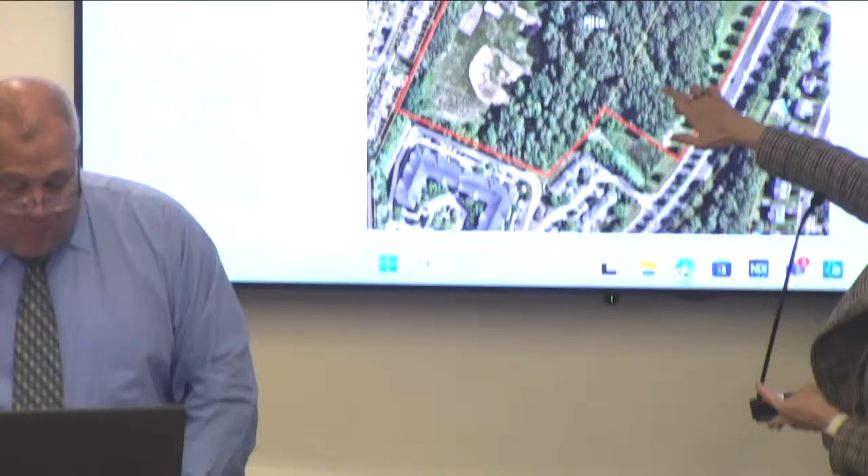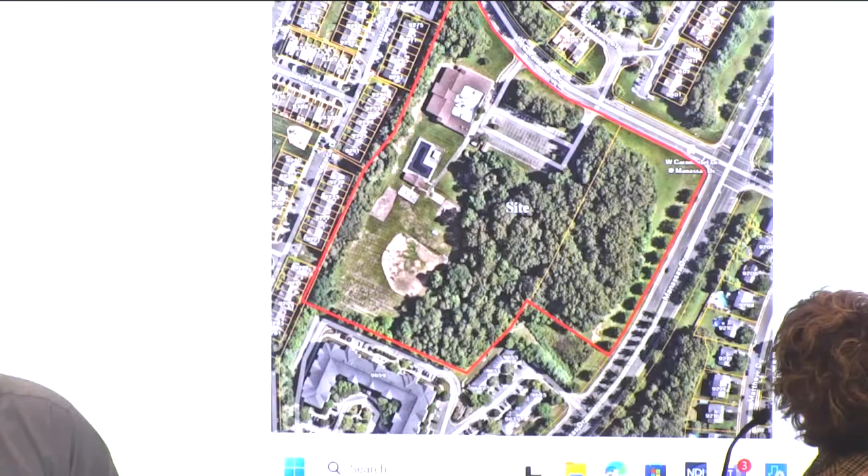So we talked about the number of units. There are 2 types of townhomes: some will be front-loaded, meaning the driveways are in the front, the remaining will be rear-loaded, meaning the driveways are in the back. The rear-loaded ones will front on West Carondelet Drive, so when you drive along West Carondelet, you'll see the fronts of the townhomes facing the sidewalk. There are also a few remaining townhomes that front on the community green, which is a 30,000 square foot amenity area for the proposal and development. We do have this one photo up here, so I would like to use it, but most of that area, excuse me, Carl, will remain as open space. It's identified as a conservation easement on the plan, measured about 150 feet from Manassas Drive, but this whole area will remain essentially as is, which is one of the benefits of the community in terms of preserving open space. So then you have a more concentrated number of units in the remaining portion of the site.

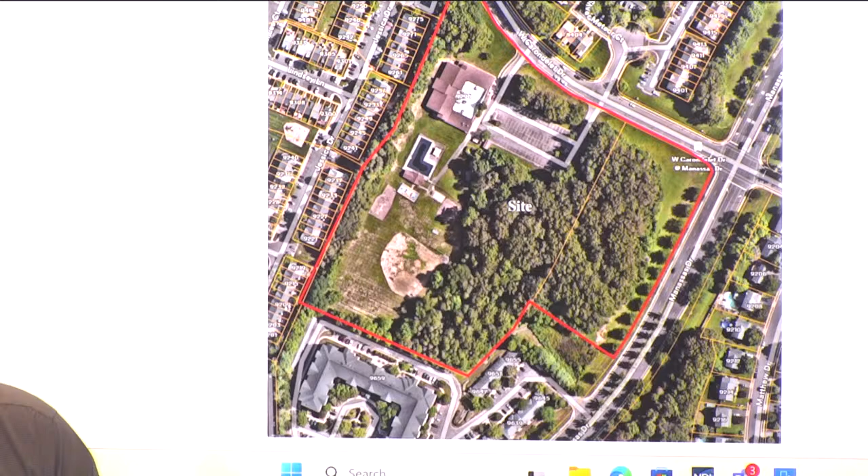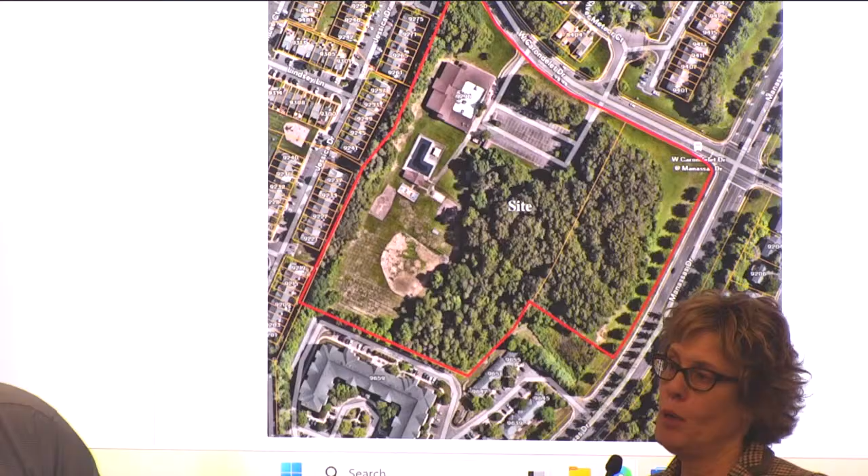There will also be 11 ADUs for the property. 6 will be workforce housing, which is essentially for city employees on a first-come basis. And then there are ADUs for city residents at up to 70% of the area median income. These are for sale, so the prospective purchasers of the affordable dwelling units who meet those income requirements will be purchasing the property through a qualified lender. So this is a home ownership program.

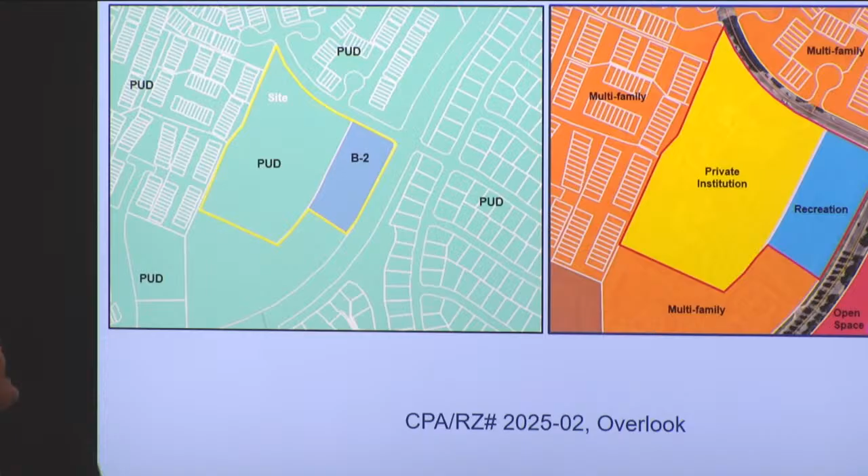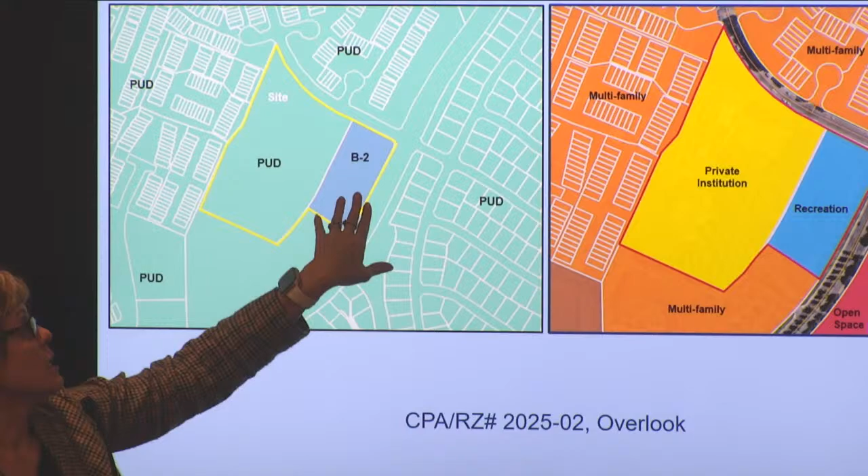Okay, so let's get back to basics: the comprehensive plan and the existing zoning. So these are the two parcels that we talked about. Here's West Carondelet. The former Christian school is zoned PUD, which is Planned Unit Development, and the open space area is zoned B2, which is commercial business.

For our land use map, what we would like the city to look like in the future—this has been identified as private institution because of the school, and this is a recreation area. It is in the Parks and Rec chapter of the comprehensive plan and deemed open space.

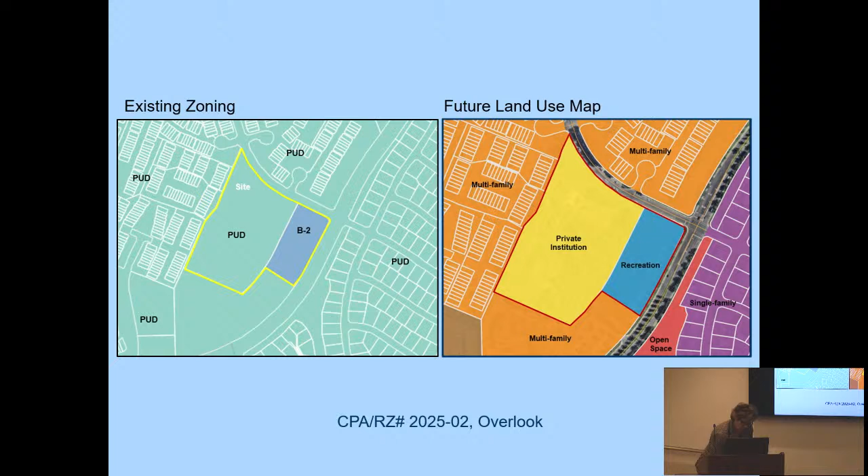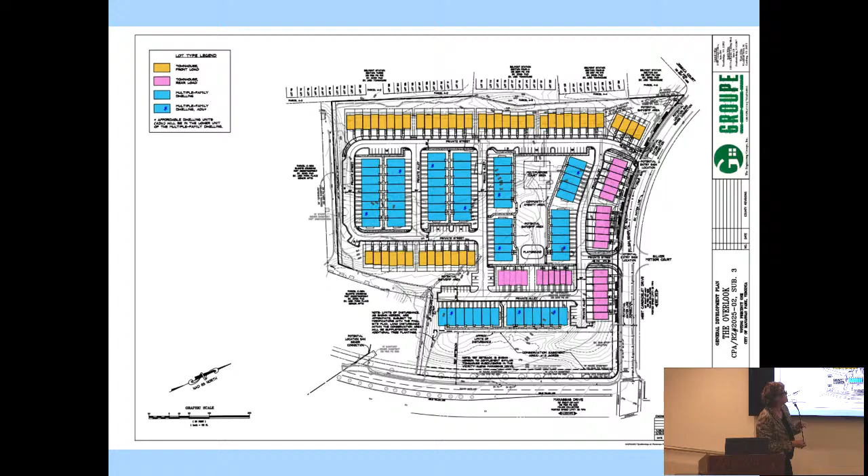Next slide, please. So the planned unit development—I just wanted to go over the zoning requirements. There are no minimum lot sizes or maximum density. This flexibility is offered for a variety of things: innovative site design, variety in housing choices, higher level of amenities, and preservation of open space and natural features.

And this application actually hits all those marks. It is a bit tighter because they are taking some of the land and dedicating it to either open space or this community amenity area, which a lot of the developments in Manassas Park do not have. So it would be a nice amenity, newly designed, for a community in Manassas Park.

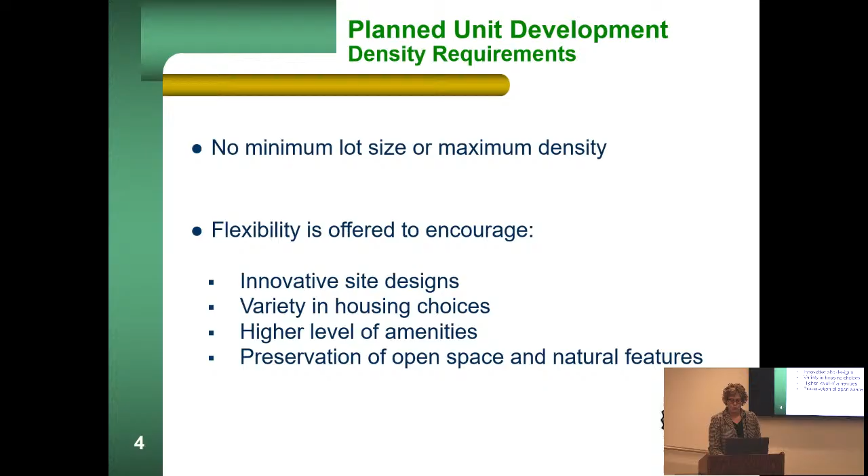Next slide, please. I did just want to take a look at the density, meaning the dwelling units per acre, of the surrounding developments. So if you're not familiar with all the names—Belmont Reserve, Belmont Station, Bloom's Crossing Townhomes, Dominion Crossing—those are all townhouse communities, and you can see that they range from 6 dwelling units per acre, 6.8, to around 10, 11, or 12 if you round up at Belmont Station.

The two apartments, Palisades and Park Place Senior Apartments—it's 18 units per acre for the senior apartments and 28.6 units per acre for Palisades. The Overlook is in between. It does have a mix of 2/2 condos, which we consider under the zoning ordinance as multifamily, similar to apartments, and it comes at 16.2. So it is in the middle of the townhome density range and the apartments.

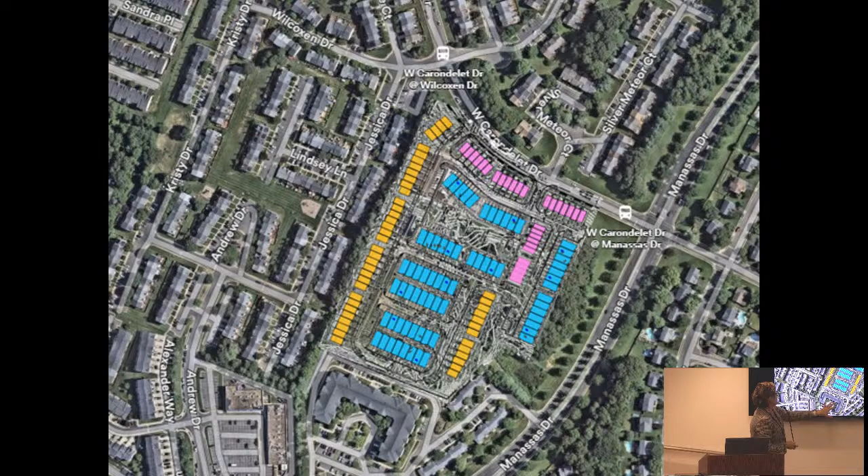Next slide, please. So I just wanted to overlay this plan on what it's going to look like in the surrounding community. I think the applicant did give some thought as to how the layout and the site could be best developed and pleasing to the residents who are going to be living there. As you can see, you have this big apartment building for the senior center, which is quite large, and what they've tried to do is concentrate that bulk of the area and intensity closer to an existing apartment building.

The ones in the middle, up towards West Carondelet—you can't see it here, but this is that 30,000 square foot amenity area that all these units will face onto this open green, if you will. And smartly, they did put the townhomes next to the existing townhome communities, fronting so they are equal or equivalent to what's across the road. Oh, next slide, please.

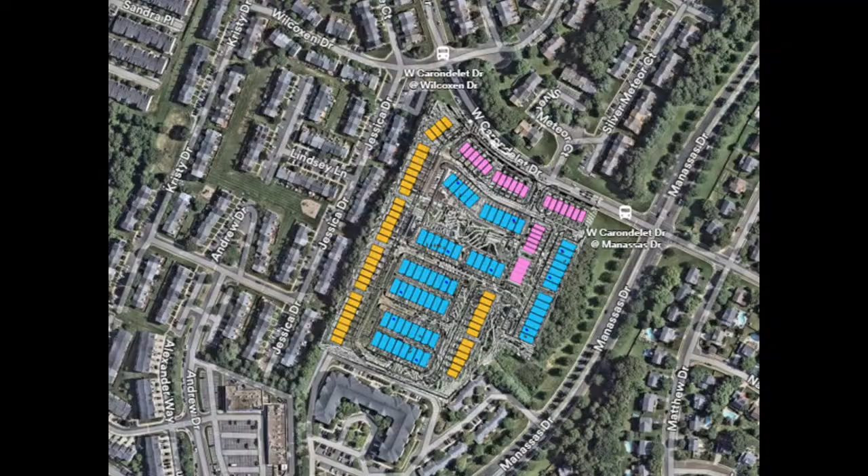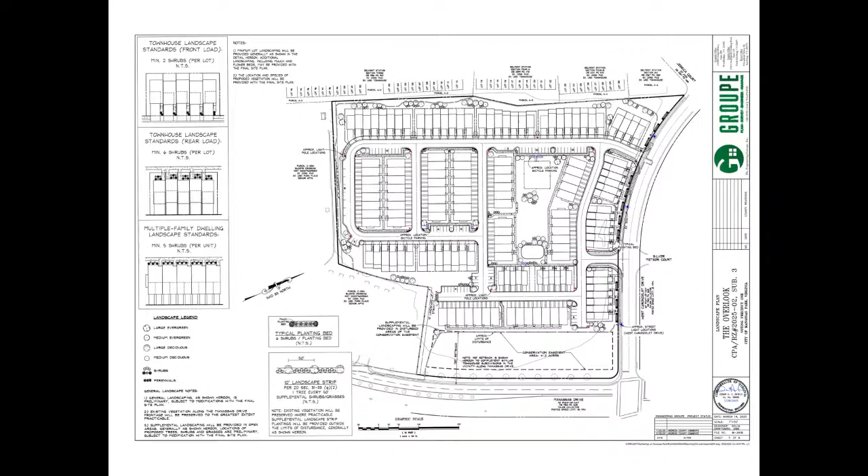I know you can't really see this, but I wanted to emphasize this is the landscape plan. You can see some of the trees and shrubs in the community, but what I really wanted to highlight is they are going to be providing streetlights along West Carondelet, 3 of them, and they will have interior lighting of the parking lots, which some of the newer communities unfortunately do not have. Staff requested that the applicant provide that, so we know there will be safety within the community.

So there are 6 public facility waivers. They all are related to private streets. I'm not going to go through all of them, but basically it's either reduction or removing some of the requirements. Residential frontage on private streets - certainly all the streets inside are private, and they will be maintained by the HOA. They couldn't be developed without frontage on a private street for this development, and many developments done recently don't need sidewalks on both sides of the street. We're doing it as provided on the GDP. There is a nice sidewalk network, especially around the green, and it ties into the sidewalk on West Carondelet Drive.

There's a cul-de-sac requirement for private streets. They're asking for that to be removed - certainly does not make sense with the site layout. And then they are requesting a reduction in the private street width, which is 30 feet in our public facilities manual, down to 26 feet. The 26 feet is the minimum requirement that the fire marshal will agree to and provide under the fire code for emergency access. So staff is supportive of that.

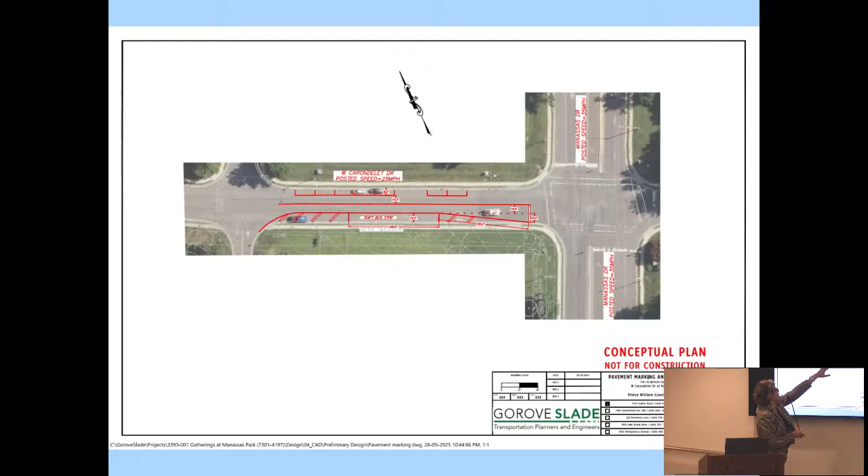So this was their concept plan. It shows that they need 100 feet for the taper. The bus stop standard is 100 feet for the safety of the bus to pick up and drop off, and then they identified this for easy maneuverability for the bus as no parking.

So staff went out to look exactly at what is currently there. This was a measurement of this area of the frontage along West Carondelet. You can see the bus stop, it's already at 50 feet for the bus area. We have confirmed with OmniRide that width or length is acceptable for a bus to safely come in and out. There is approximately 141 feet of on-street parking, and there's no parking measured approximately 20 feet from the curb. There's no signage here, like 61 feet to the first bus stop sign, which has an arrow. This bus stop says no parking, the arrows are pointing inward.

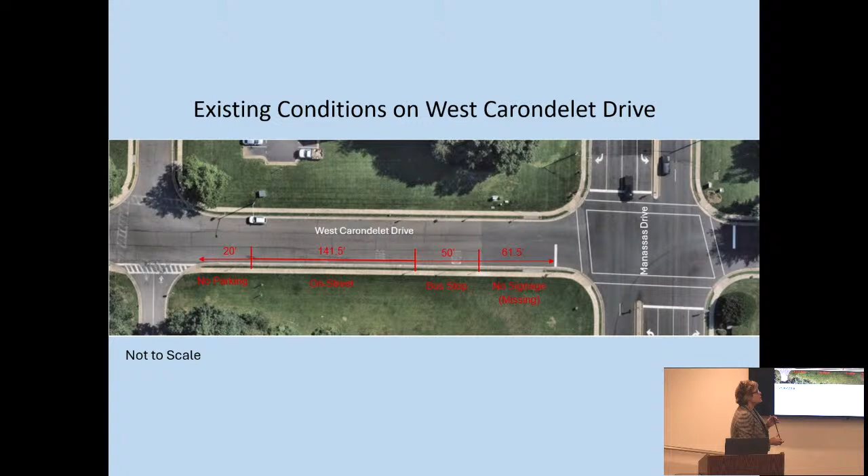So I asked staff, because we have a requirement that you cannot park within 30 feet of a stop sign, and the stop sign's right at the stop bar, so there is no signage here. We believe somehow the signage is missing, but this probably should have been no parking all the way down, so that's 61 feet. In working with OmniRide, staff has come up with an alternative proposal, which does move the bus stop, and OmniRide requested that if it is moved, it become ADA compliant. It does accommodate the taper as recommended in the traffic study. There is a reduction in on-street parking, but only approximately 2 cars, which is 40 feet, and then retaining the no parking 20 feet from the curb.

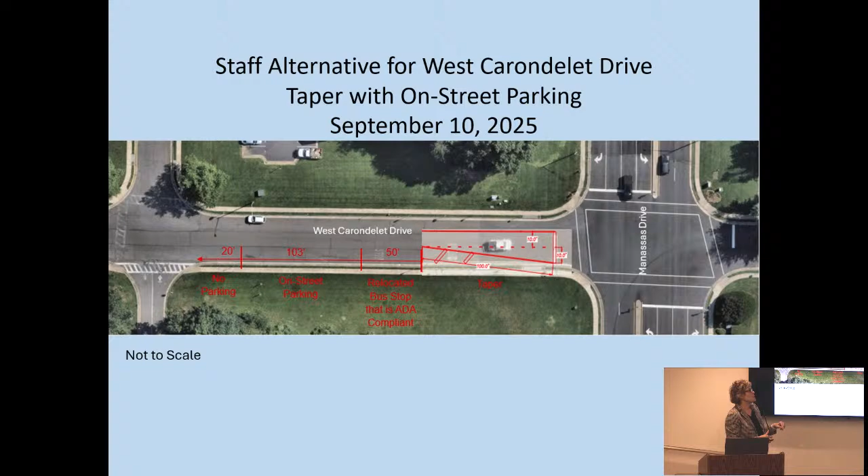So I just wanted to highlight some of the main points of the application. They are providing affordable dwelling units. They have significant parking, and I just wanted to touch on that - you know, parking is a big issue.

Just for some history, we did update the parking regulations in 2016, and while the townhouse units remained the same rate, the multifamily did not - it actually increased. It was 1.5 spaces per unit, it is now 1.75 spaces per unit plus 1 space for every 10 units. So 1.85 actually when you do the math.

And most importantly, the garages are counted as half a space, so all the surrounding developments were parked under the old code. This is one of the developments that will be using the actual regulations in the zoning ordinance for parking without any waivers. So they are providing 279 driveway spaces, counting only 140 garage spaces, and then 80 surface spaces in the development. So when compared to adjacent communities, there is a lot more parking for residents here than in other existing developments. They do have a central community space, a significant green area with a playground, a multi-purpose court, and green space for picnics or relaxing.

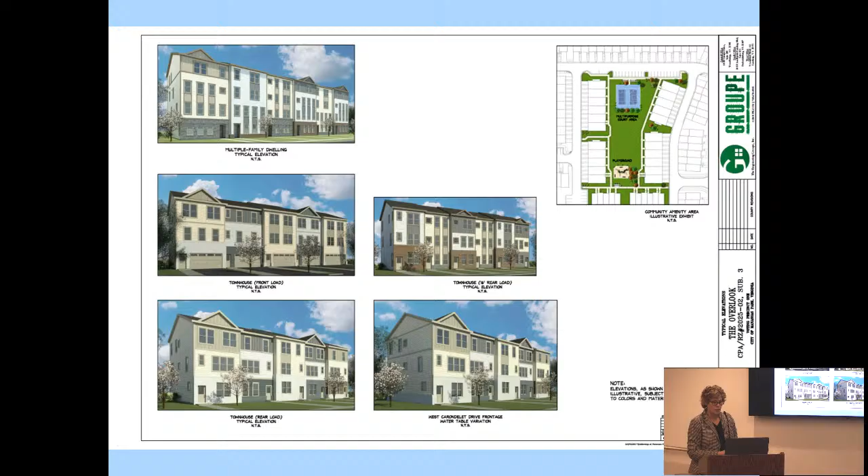Here is a rendering of the development as it would look from the perspective of West Carondelet Drive and Manassas Drive. You can see the street trees here, and there's still a lot of remaining trees. You can see the townhomes along West Carondelet Drive, and a portion of the 2-over-2 condos, though they're enclosed within the community. They are proposing to put some type of masonry water table on the end units, just to give it a little more architectural character as you drive by.

This went to the Planning Commission last week. They made a decision on September 10th; the public hearing was a month before, in August. The Planning Commission recommended to the governing body approval of a comprehensive plan amendment to change those parcels to multifamily residential. They approved the rezoning, subject to the general development plan shown, which is the third submission, and the proffers dated July 28th, 2025. They also wanted to modify the application by constructing the staff-recommended taper with an ADA compliant bus stop and about 100 feet of on-street parking. The Planning Commission recommended approval of all the public facilities waivers except one: they wanted to retain the streets as 30 feet in width. That was their recommendation.

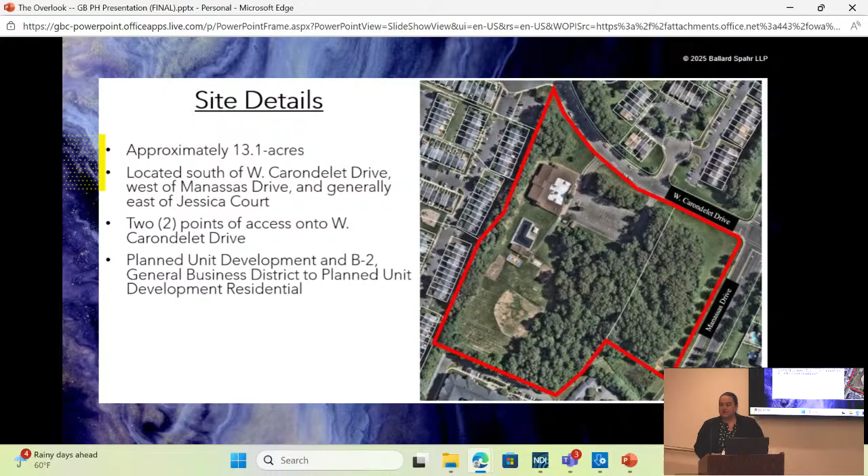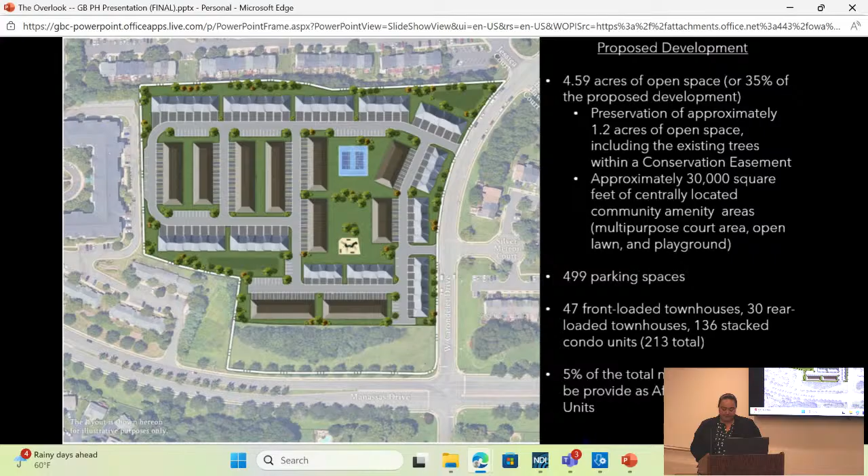The Overlook provides a thoughtfully designed community with 4.5 acres of open space, including a robust 1.2 acre tree preservation area along Manassas Drive and a 30,000 square foot centrally located community amenity area. Something we consistently heard from the community was a desire to see parking provided in excess of the 432 spaces required by the zoning ordinance. We are pleased to provide 499 parking spaces, 67 spaces in excess of the ordinance.

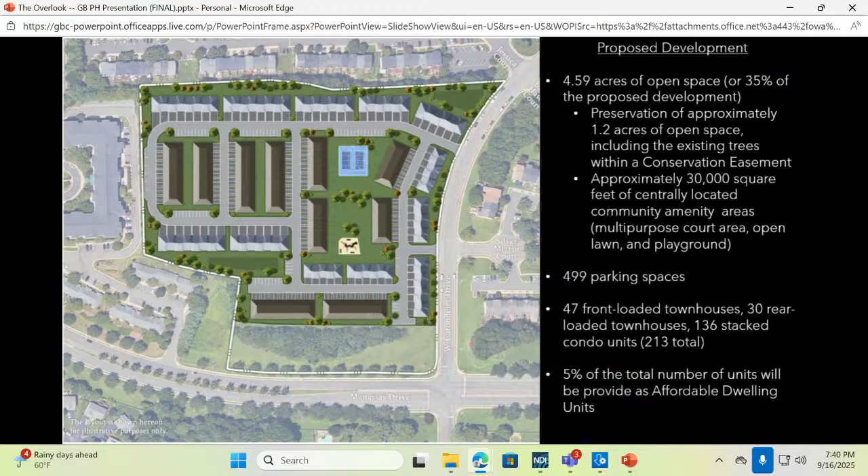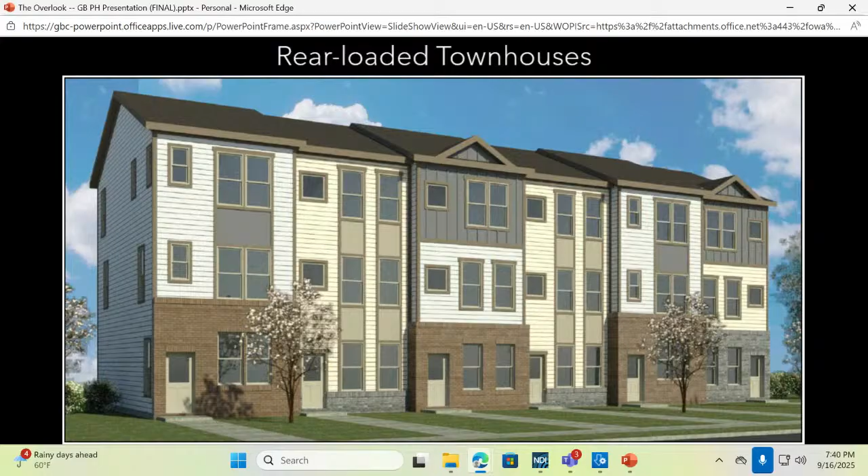The community consists of 47 front-load townhomes, 30 rear-loaded townhomes, and 136 stacked condo units, for a total of 213 units, 11 of which will be affordable dwelling units.

Although staff is supportive of the application, they identified one open question in the staff report. In short, while the traffic analysis concluded that a right turn lane taper along West Carondelet Drive may be warranted, it would require removal of the on-street parking. We've heard from the community that retaining the on-street parking is critical, so in the proposal before you this evening, we have deferred to the community and are not proposing the right turn taper.

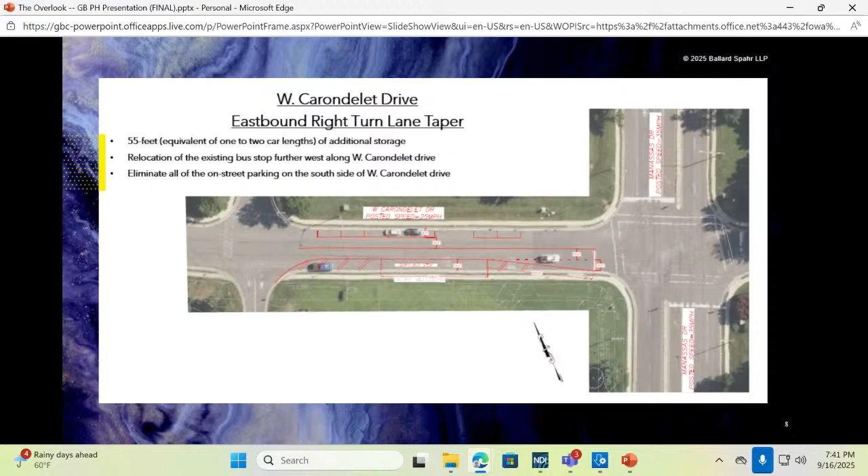However, the Planning Commission, as part of its recommendation of approval, is endorsing the staff alternative depicted here, which Michelle detailed in her presentation. The applicant is amenable to providing this alternative if so desired by the governing body.

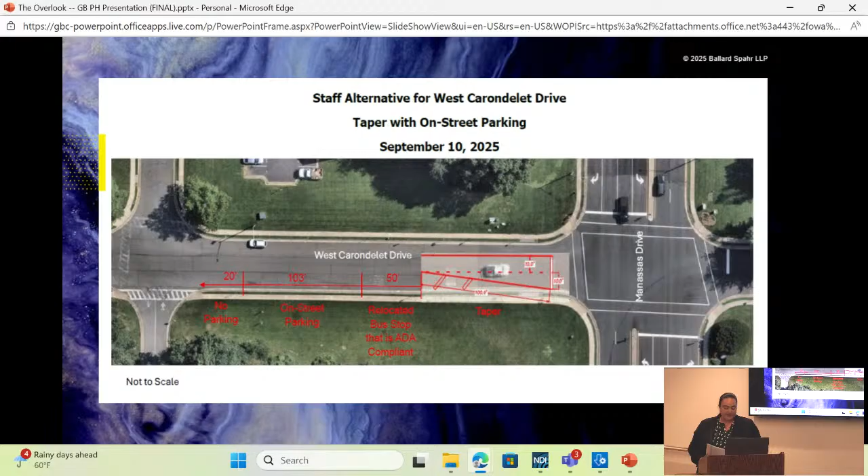While the application has been processing through the city, the applicant engaged with the Belmont Station HOA, Bloom's Crossing HOA, and Park Place on several occasions leading up to this evening's public hearing. Most recently, on July 22nd, the applicant hosted a community meeting advertised on the city's website with residents of Belmont Station and Bloom's Crossing to walk through this application and answer questions. Based on feedback from the community meeting and Planning Commission public hearings, we'll go into more detail on topics such as parking, transportation, schools, affordable housing, and the shared property line with Belmont Station.

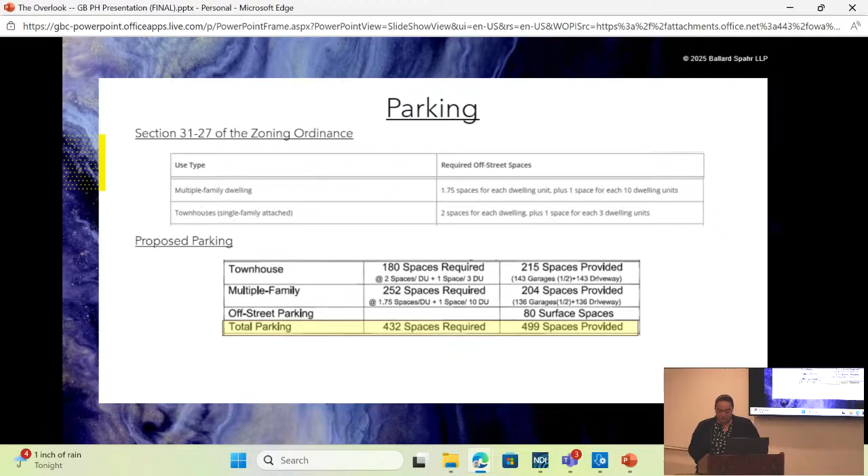First, parking. We are providing 67 spaces in excess of the zoning ordinance, which requires 432 spaces, for a total of 499 spaces, 80 of which are off-street surface spaces. It's important to note that each garage space only counts as half of a space. Kayla Ord with Gorove Slade will dive a little deeper into transportation now.

So as was mentioned, the property was previously occupied by a private school, and before the school closed, we collected traffic counts to establish a baseline trip generation for comparison. In the morning, the school's peak overlaps with the commuter peak hour, and because of this overlap, the proposed residential use will actually result in a reduction in traffic during that morning peak hour.

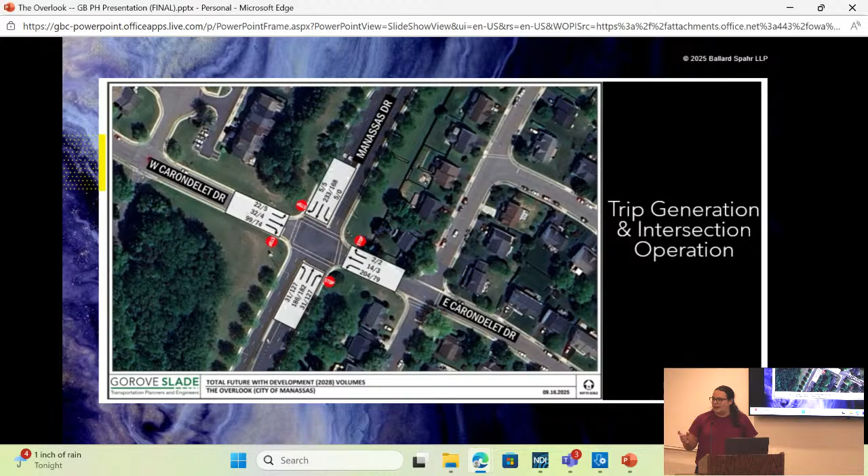And then in the afternoon, schools typically experience their peak a little bit earlier in the day, whereas residential traffic occurs slightly later and more in line with the commuter peak. So there is a small increase in traffic in the PM peak. But overall, the total difference in trips between the previous and proposed use is minimal.

We did need to do a traffic study, however, to look at that main intersection. And the graphic you can see on the screen shows the future AM and PM trips.

The analysis showed that this intersection operates at an overall level of service B, which Mickey touched on earlier, with average delays of less than 20 seconds, and the queues were contained within the storage areas. When we compared the results with and without the site, the difference was minimal and it was still operating at an overall level of service B.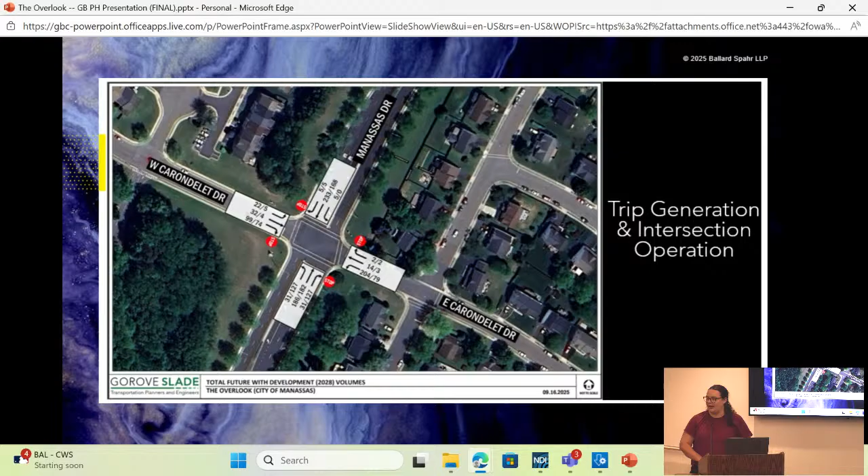Even though it's operating at a level of service B, city staff did also ask us to review whether the intersection meets the warrants for a traffic signal. This determination is based on regional and national standards outlined in the Manual on Uniform Traffic Control Devices, or MUTCD for short.

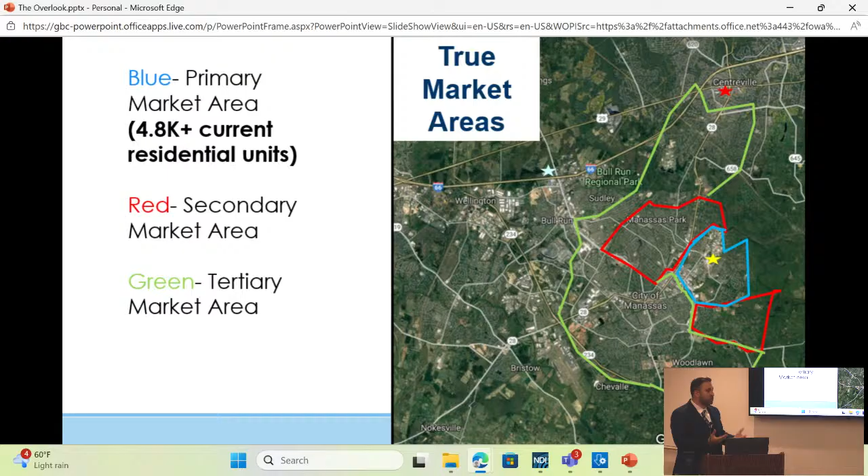Next, please. So skipping on now to the specific issues of density that were raised by the members, and I understand the concerns coming from residents. Every time I did a town hall, there was always concerns about density and what the issues were. I want to hopefully provide some data to help bring down some of those concerns.

The issue here, for the city of Manassas Park specifically, is that a lot of our funding from the state is dependent on student population ratios, and the city is heavily funded by the state compared to taxpayers. As Sam said, the estimated number of students generated by this is a total of 76—well short of the 340 that have been lost over the last few years.

Other concerns were just too many people in our city. If you look at some of the data, the actual population is starting to decrease in Manassas Park, and that's also true across most of Northern Virginia. We're starting to see an out-migration from Northern Virginia, a lot of which has to do with housing and the lack of affordability when it comes to housing.

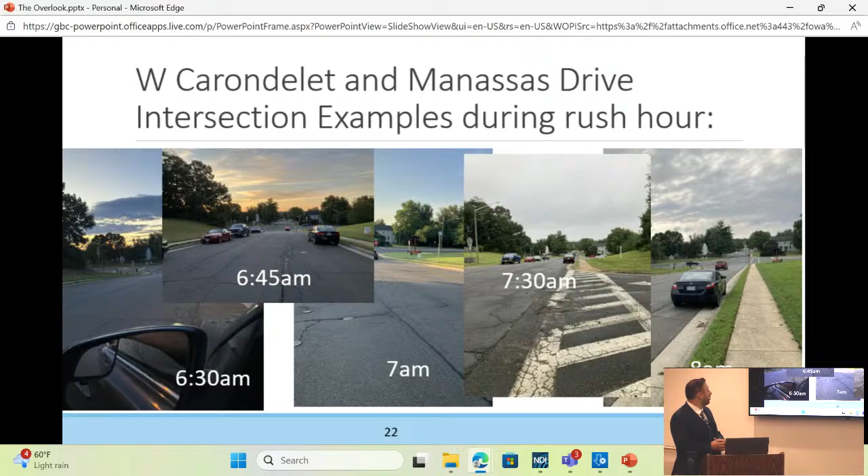Please go out and look at this yourself as well, but this is what it looks like, that intersection in the morning during this period. It's a steady trickle of flow of vehicles.

Next, this is Signal View Drive. Remember I talked about how Signal View Drive has increased by 1,000 vehicles over the same period. Look at that around 7 a.m. right? That's where you start getting traffic coming onto Manassas Drive as well.

Next, and in the evening, keep hitting next. You can see these cars, I follow them, 6 p.m. Most of them turn right. Please pay attention to that on the drive home. See how many vehicles are turning right onto Signal View Drive versus going straight back into Bloom's Crossing.

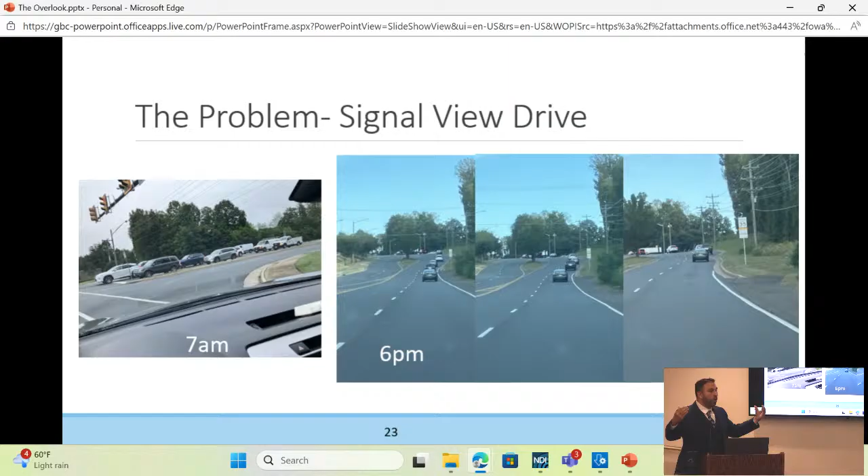The other problems too, you see school buses, right? You get stuck behind a school bus when they're dropping off kids. That creates certainly some traffic. But the biggest source of traffic by far is not even Signal View Drive. It's Route 28 and all those connectors from Prince William County that are feeding onto Route 28.

Next, please. Parking. We touched on this as well, but just next slide. As way of background, the city's been discussing parking over the last few years. There were a lot of town halls that were done on parking. I suggest that probably needs to happen again. The solution that was brought up was a no commercial vehicle ban. You guys remember all the signs that came up across the city not allowing overnight commercial vehicles? That was a strategy at that time. It probably needs to be revisited if there's ongoing community concerns for parking issues. But again, in terms of this application, the applicant is in compliance with city code.

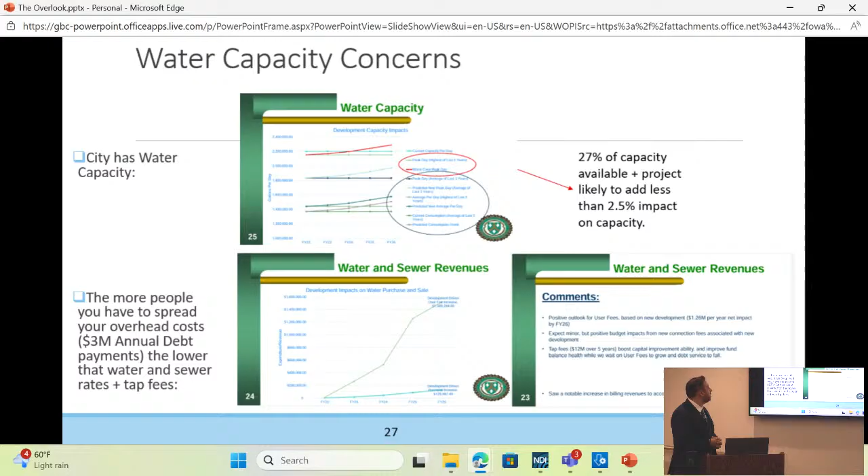Next. That's all I have, Sam, if you want to close this out.

While they're pulling that up, I'll go ahead and just give you my concluding comments. If you can go to slide 17 when you have a second. While we believe the density proposed is appropriate because it is supported by the comprehensive plan and the zoning ordinance, it provides a transition or a stepping down of density between the apartment building Michelle spoke about and the townhomes to our north and west, and is supported by the traffic impact analysis that Kayla spoke to and staff's recommendation of approval. That said, we understand that the community and the Planning Commission may feel otherwise, so at the governing body's pleasure, we are open to modifying the density.

We have enjoyed working with your staff, and this concludes our presentation. I am joined by the applicant and members of the project team, and we're happy to answer any questions you may have. Thank you, thank you very much.

All right, I will take questions from the governing body first. We'll start with Councilmember Seiberling. Any questions for the developer?

No, it's fine. Okay, we'll go, which way do we go? This way. Councilmember Javed? I'll wait till the end. Yeah, not this time. I had one question.

I appreciate the 11 ADUs, and the map that was shown, I'm not sure exactly which one it was. It seems like all of them are in one of the 4 types that you described. Correct. And that's a little disappointing. Why weren't some of the townhouses and some of the others chosen to be ADUs? They're proposed in the 2/2s. Steve, if you want to speak to the placement of it, it's not something I was a part of.

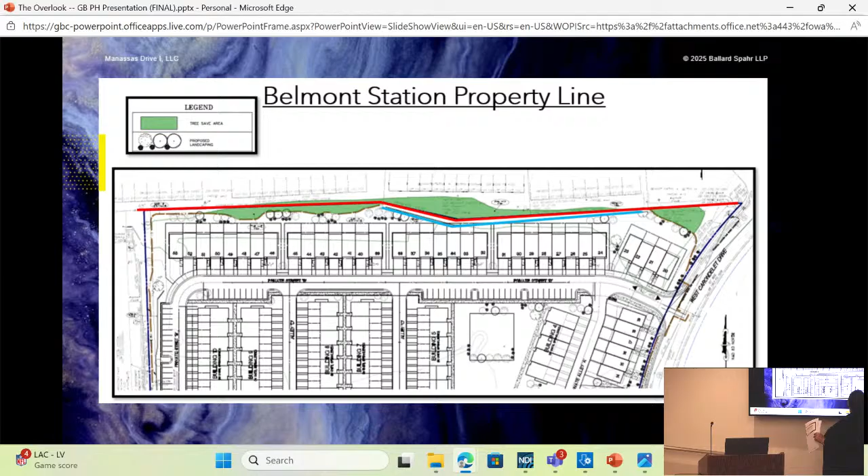And so there's significant grade differential between the Belmont Station townhomes and our property. So we sit beneath the Belmont Station community. So the wall that's proposed is shown in blue because the grades kind of start out flat and then the grade differential occurs. So the wall is proposed only at that grade differential. So it will step up, correct? The wall itself will step up? Right, but the wall itself varies in height based on the grade differential between there. So as you can see, the wall is just along this area, and then the rest doesn't require a wall because the grade differential there is not as significant.

Okay. Does that help? I'm looking back at my notes. Retaining wall. We are beneath Belmont Station, so there's no digging down. We're already kind of sunken in compared to Belmont Station. So our grade, we are lower today already. I think that was everything I had written down.

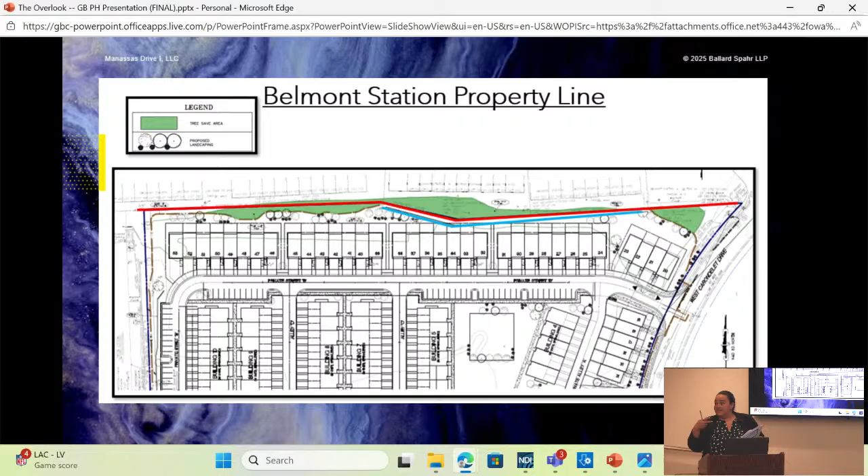Construction traffic, do you want me to address that one? Is that okay? Yeah, that works. We're not planning on using Belmont Station. We're maintaining, as I mentioned during our presentation, the 2 existing access points that exist at the site today, and we would use those to exit and then go on to Manassas Drive and then leave into the regional road network. But there's no plans or anything to use any of Belmont Station.

And while you're up, will you speak about the tree buffer around the property on any side where there's a tree buffer? I know there's one up north. Sure, the top of the picture and on the bottom as well. Can you go to the last 17 or 18? No, the other way. Sorry. There you go. So the development has a total of 4.85 acres of open space. That includes this significant 1.2 acres of existing treed, like the knoll. I don't know if this is the snow hill she was talking about. That's the sledding hill.

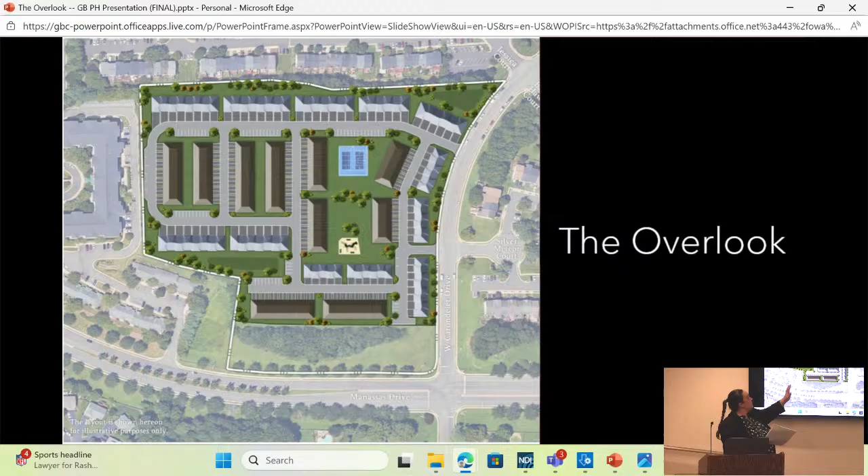That will remain in there. And then everything that you see in green is open space, and then the landscaping is, as you can see, depicted throughout the development as a whole. The central community area is a 30,000 square foot area. It includes a multi-purpose court that would be striped for basketball and pickleball. And then you've got a passive area, which lends itself to pickup football games, soccer games, picnics, just letting the toddlers run around. And then there's a tot lot, playground structure.

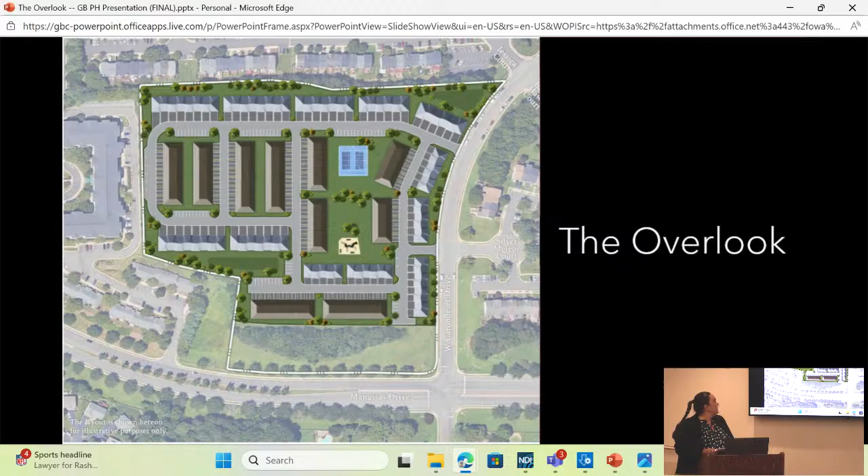Anything else specific about the buffers? No, I think that's great. Thank you. And then, Mr. City Manager, could you speak about the impact to our property taxes and our water bills? Certainly.

I'll start with water. The way our water is purchased, there's a component that is a set price, so the more users we have, the more people using water, the less people have to pay of the base fee you'll see on your water bills. So it will not result in increasing the cost of water, it will result in decreasing the cost of water. Every rooftop will incrementally decrease the amount we have to pay for water.

I'm sorry, what was the other thing? Property tax? Yes. Well, property tax is a function of the market, right? So if this development resulted in an increase in the value of your house, then you could look at an increase in your property tax. But it doesn't have much correlation to the development. It has a lot more correlation to what your house is worth in the market than what else is around it. I can't see this devaluing anybody's property, which might be a bad thing - you might want your property to stay low - but most people look at property as a wealth building tool, so I would say this probably will have a positive effect on that, certainly not negative.